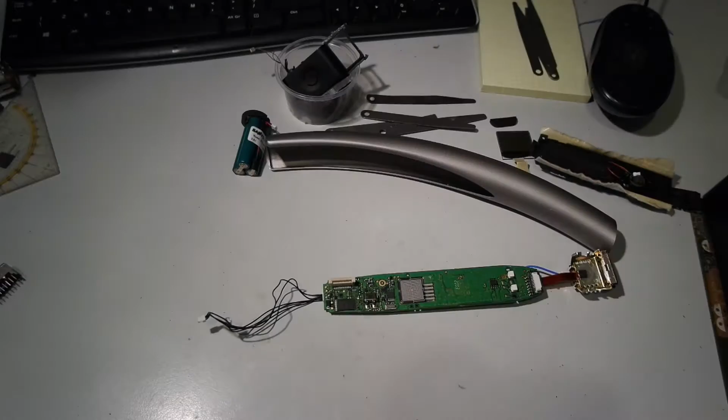The last time I worked on this phone was a while ago, and in the meantime I've been busy with other stuff because I didn't really know what to do with these plastic rivet kind of things. They're not really rivets, I think, but I presume they are attached to the top part of this assembly, and then heat staked or just melted to form a sort of rivet bond.

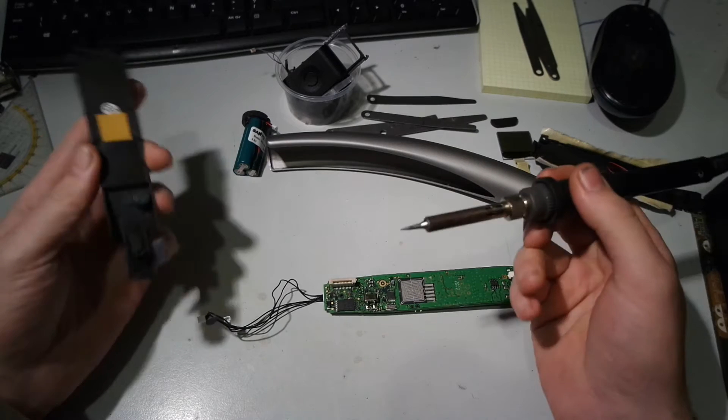This part is made out of two smaller parts, and I'm gonna try melting those rivets again and see if I can pry it open carefully.

This is an old soldering iron tip. I've already got some new ones, and I didn't really like this one anyway, so I'll use it on this phone. Put the plastic in a stick vise, and my soldering iron set to go above 200 degrees Celsius.

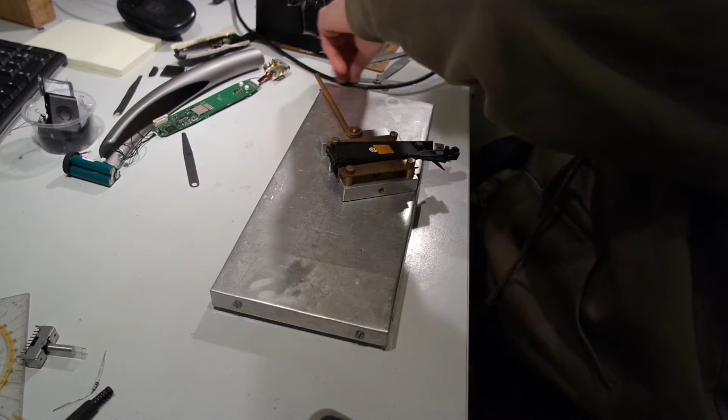Plastic is melting. The feeler gauge is doing the thing. This part isn't square, so it's not easy to hold in a vise.

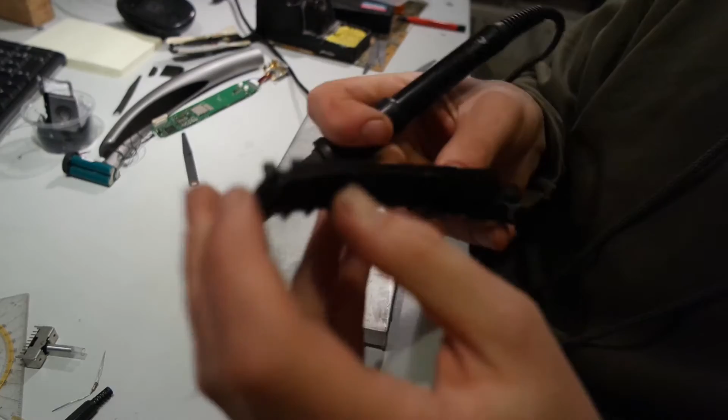This is the first time I'm trying to unsolder plastic. The first one gave way. You can see it's closed, and this one is open. And there's this hook - I don't know if it's grabbing the top part or just for locating it. I'll have to see.

Might even try a bit lower temperature. I don't know if it's accurate anyway, so I only use it as an indication of the temperature I want.

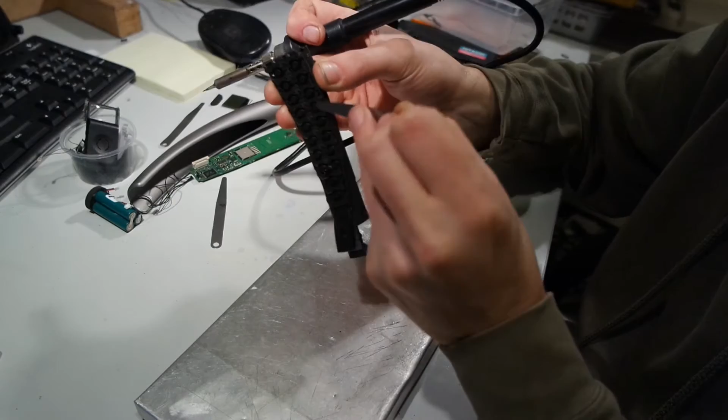I decided to unmelt these, partly because I recently did a project in which I tried some gluing of ABS plastic, and it seemed to make a good joint under certain conditions. So I'm planning to glue this back up using that technique.

Maybe overheating this one, or over-melting even. This is a protective pad for a directional button. I'm gonna remove this one.

This is... I don't know if I can focus. Maybe like this. I think I can remove the bits of molten plastic if I want, or some I can just leave like this. It will probably fit back together.

This is the top of the bottom part, which is just a solid base for the contacts. Now there's something in here - I think it's the microphone.

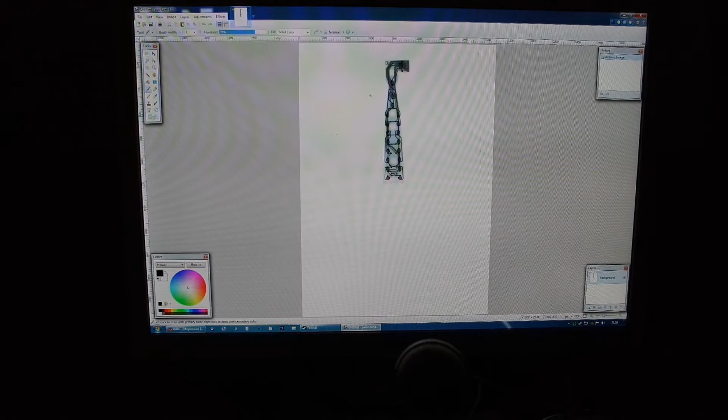In my last project with the keyboard, I thought about scanning one of those flexible circuit boards just with a scanner and loading it up in a computer to see if you can do some line tracing with it. I've scanned it. I will scan the backside in a minute, and then I'll try to do some editing on the scans.

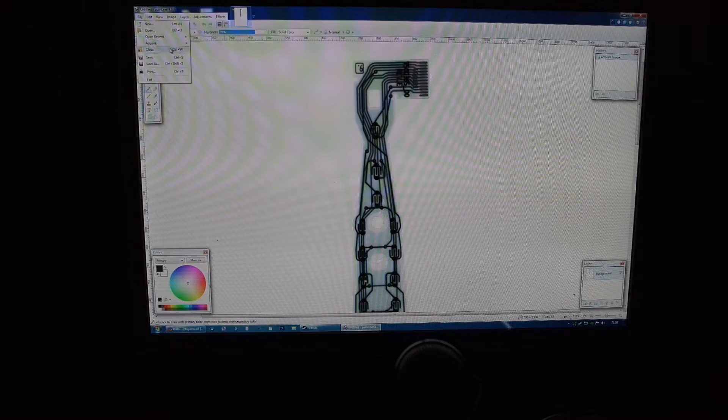So I've put them side by side. Maybe I can do this.

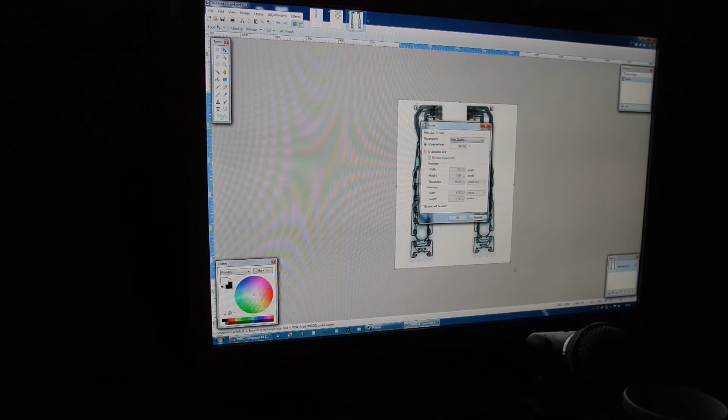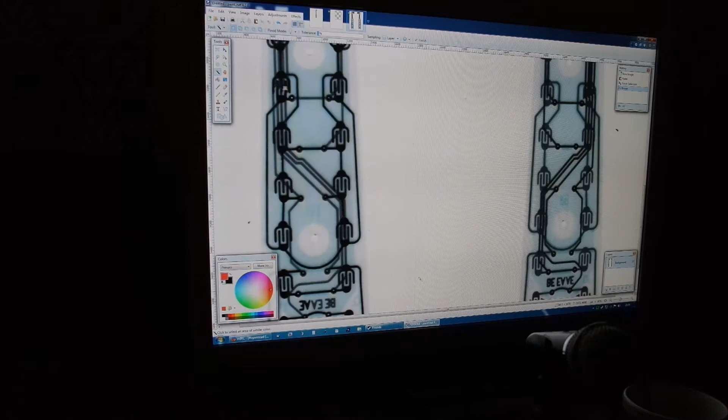It will create quite a hefty file, but now it might be easier to get some pixels from the lines. Let's just pick a color. Let's see - basic one, tolerance.

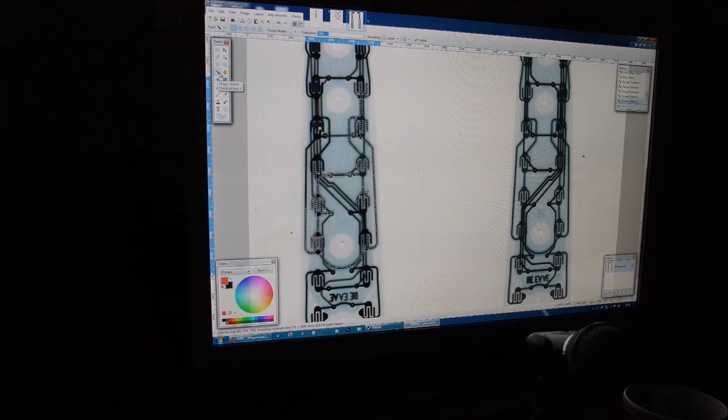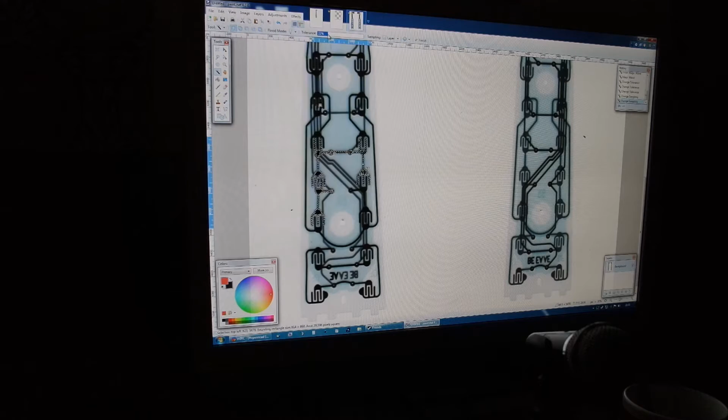It's making a contact here where there isn't, because there's a layer underneath, which is also a dark color, and the tolerance is set too high.

Let's paint this red. Let's put this all the way up.

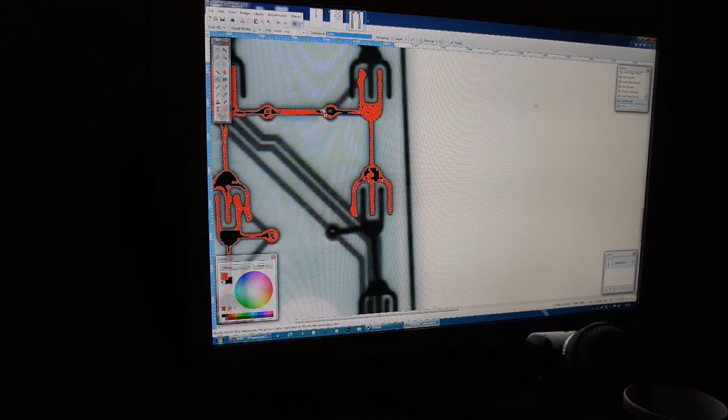Right. It was not supposed to happen.

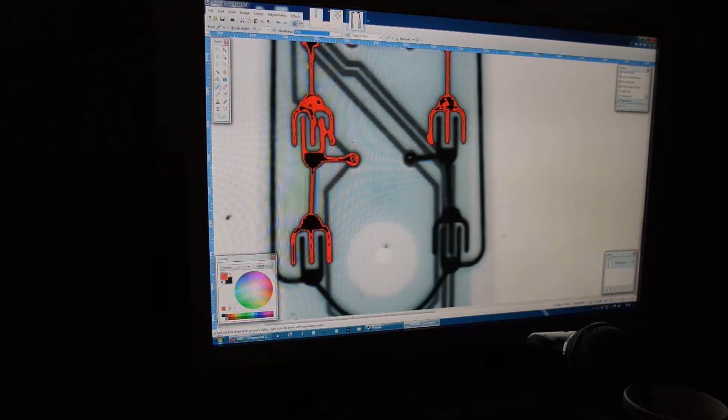So we can follow this wire all the way. There's a via here where it disappears on the bottom layer, which is mirrored, so it's this one.

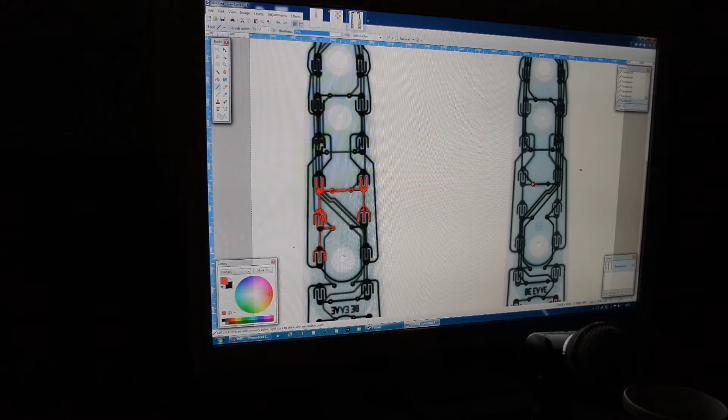Tracks. Here the colors are quite similar, top and bottom layer, so it might be a bit harder to use automated tools.

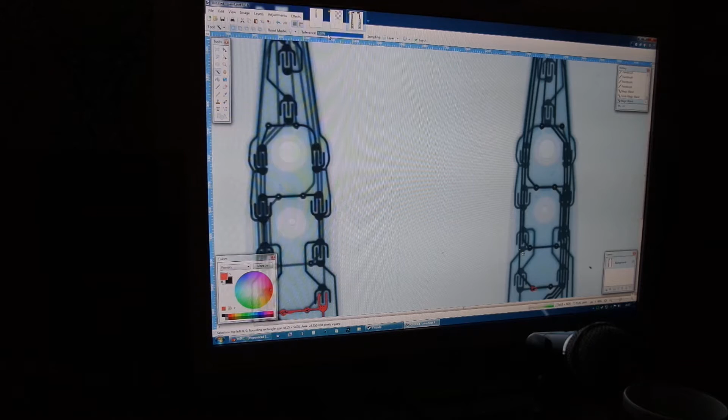Here the selection area is bigger than it should be. Wait, this one has a line tool.

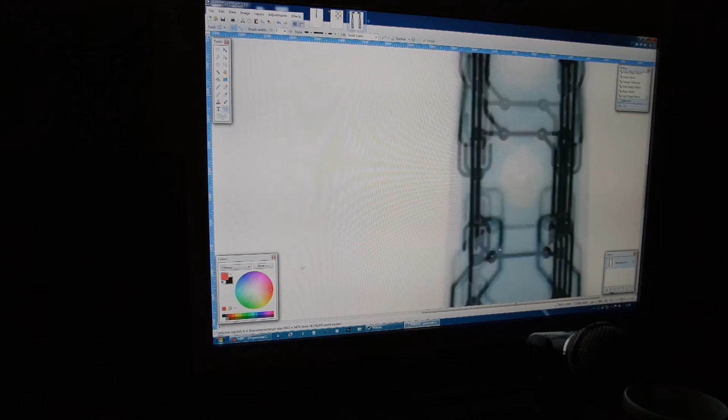This is paint.net 4.06. Oh, making a nice bendy line. Solid line, flat. Okay.

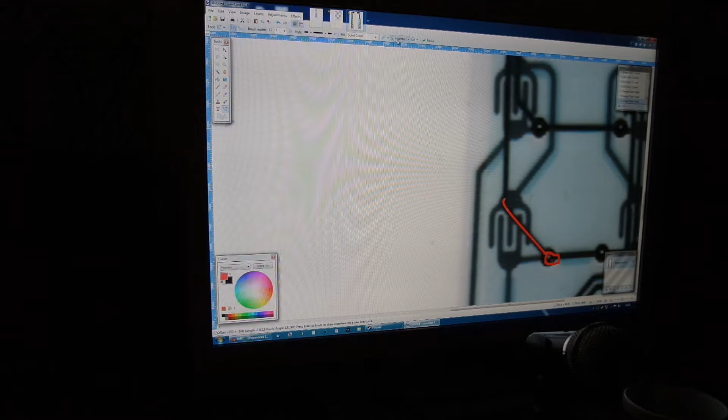I'll just make a new one. Let's see.

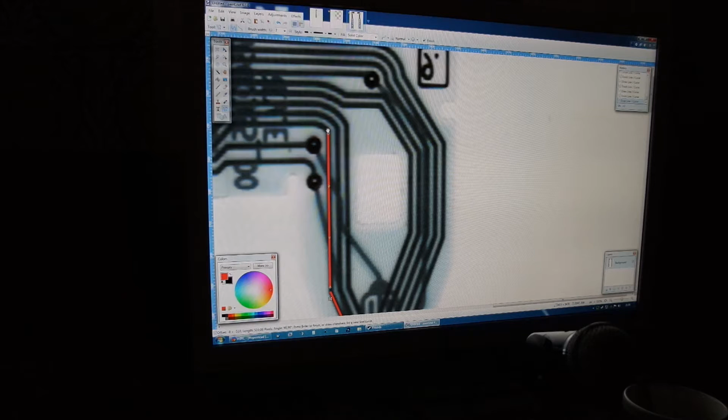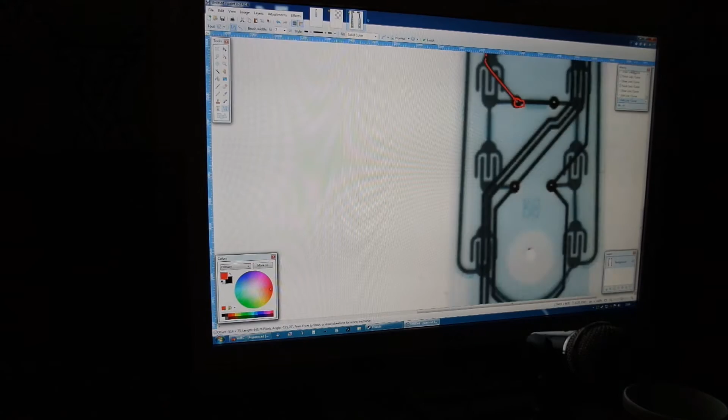I mentioned a project with the keyboard, and the type of conductive layer was a bit different than on this flexible circuit. This one might be a bit more delicate and prone to scratching.

Now I just did this as a test. I will now continue to fill most of the circuits with colors.

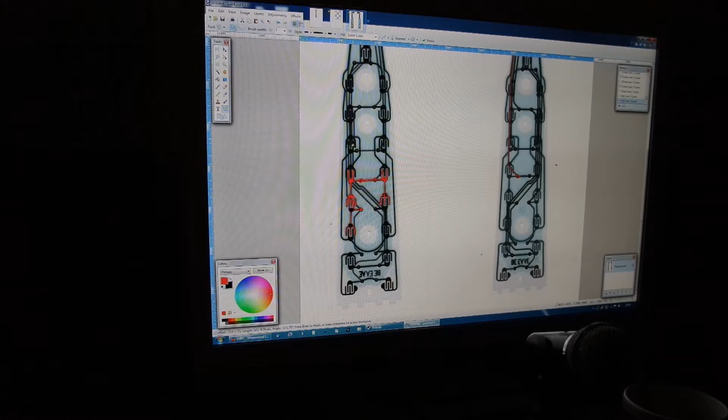So I traced everything. Didn't take too long. I don't know how long exactly, but I can find out if I zoom out a bit, or by the dates from the video files.

These are the traces for the contacts. It's a dual layer board. There's contacts on one side and covered contacts on the other side with vias.

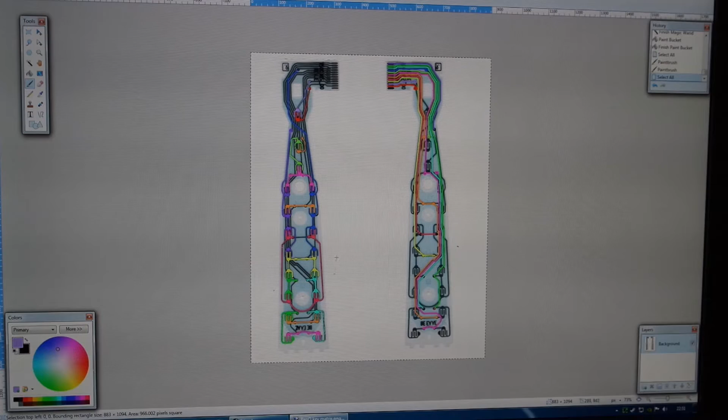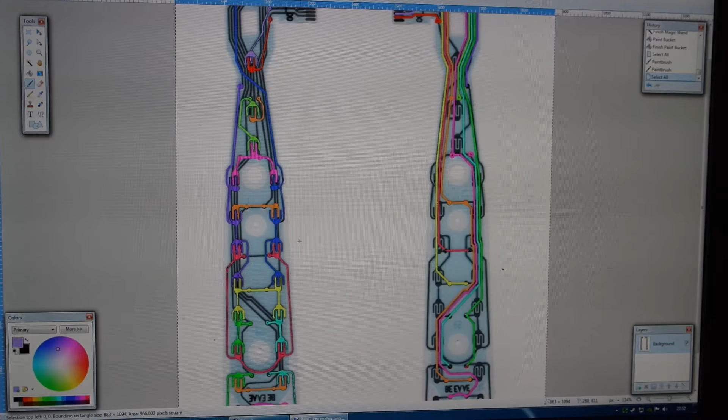And now I know what I need to check if I want to fix the numbers. I've got this number 3 button, which is orange, connects with number 4, and 2 other buttons which I don't remember. And it is the 6th layer from the left hand side, if I look at it this way.

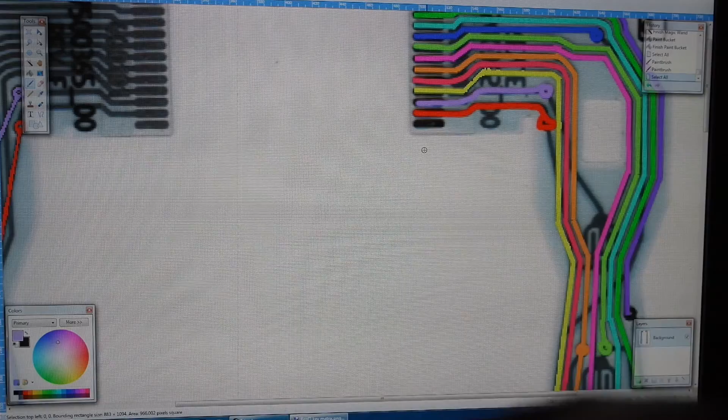Well, this wasn't too hard, and now I can look it up if I have more troubles with buttons. Maybe I won't be able to get the top back on in one go, and maybe not all buttons will be functioning, so I can always use this later. I saved it, and maybe someone else can use it too.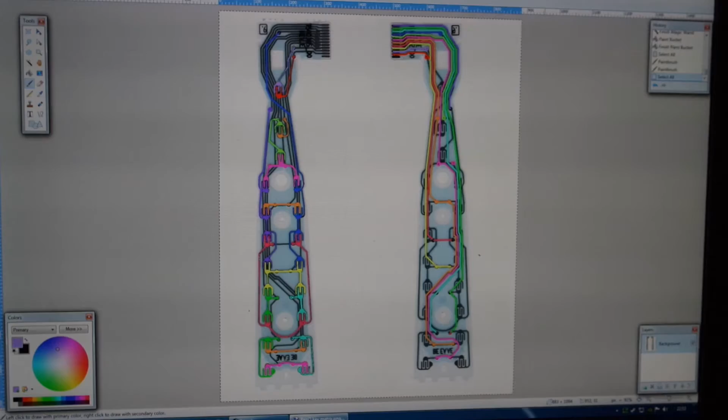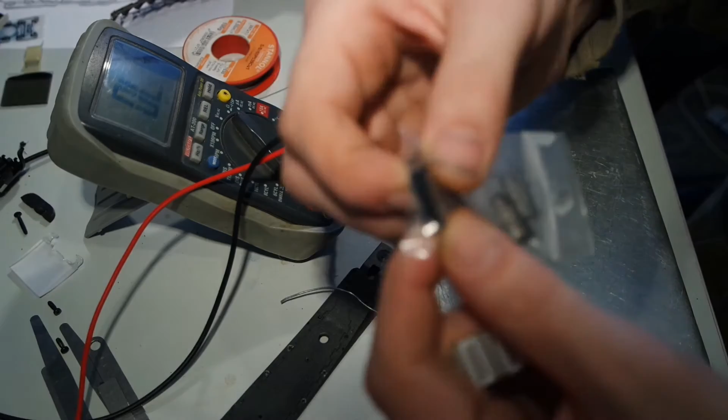I remembered I had a few of these displays. They come with a flexible connector. It's a 14-pin connector. They also came with a set of connectors to solder on the board and adapter boards.

So I put this testing connector together. It fits the flexible circuit from the phone. This one has 12 pins, this one 14, but that's not a problem. You can just fit it in here.

And I also remembered I had to fix the wire for the speaker, and since I'm soldering, I might as well do that now.

These wires are sometimes a bit hard to strip. I'm trying now with a scalpel. I don't want to have to remove any more wire than is really necessary.

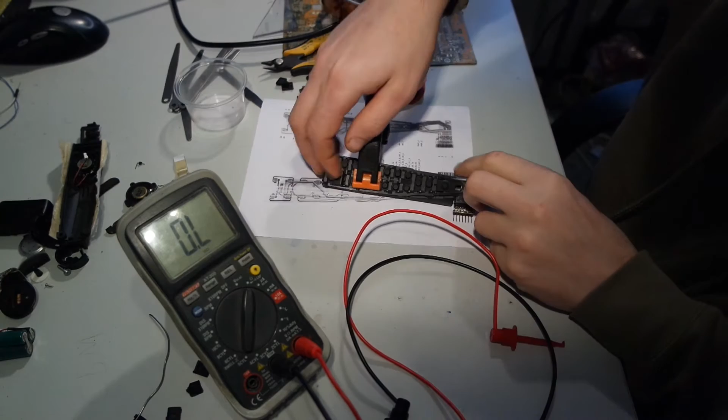Then I'm gonna do some testing. I put all the parts together. It's not fixed or anything like that.

And the problem was the 3 button. If I find the 2 leads it's connected to, let's see, number 6 and number 10. Six. And 10.

Then I'm getting a connection now. There's 2 leads for every button, and every lead has multiple buttons, so there's some kind of matrix. For example, button number 6 also has number 4. And if I check the other lead for number 4, that's pin number 11.

Then I can also measure its connectivity. There is some resistance in the lines. I think it's got something to do with the type of conductive layer they use.

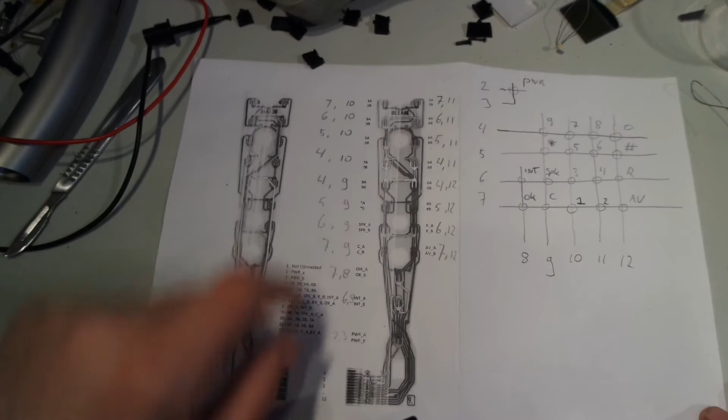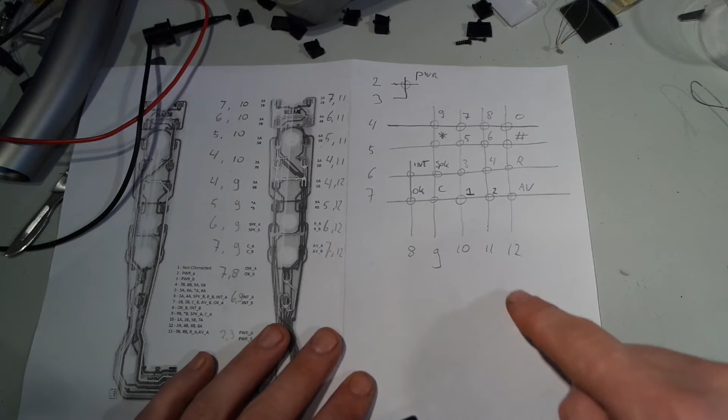I'd listed the buttons for the connections, but not the other way around, so I did that. It makes it easier to check. And you can see that every button has 2 leads, and these leads form a kind of matrix. There are, like here, 4 or 5 data lines, and button 1 is over here, button 2 is over here, and there doesn't have to be any logic in it.

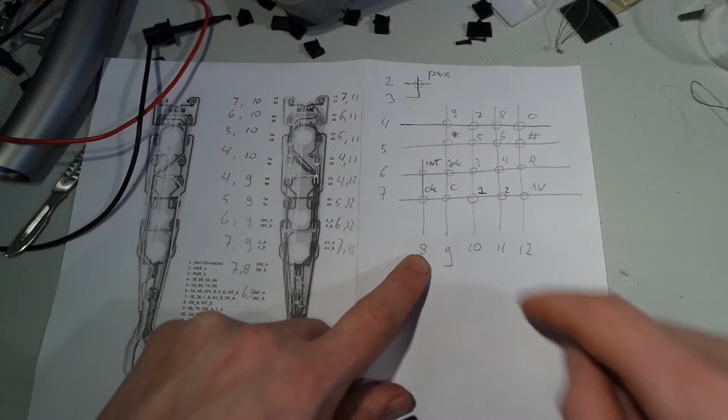But what happens is that the phone's electronics check if there is a connection with line 8. It checks the 6 or the 7. If there is a connection, then it checks the next one, and the next one, and so on and so on. Only the power button is separated.

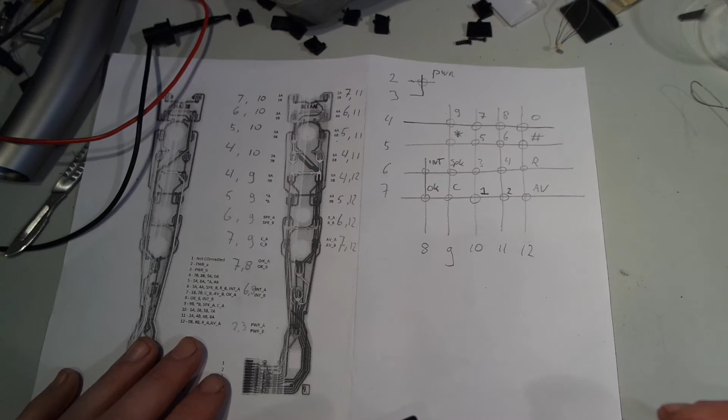It's used to save energy. If the power button isn't pressed, then the checking can be done at a much lower rate, so that saves a lot of energy.

The scanning is constant and very fast usually. It's called multiplexing. That's how most button panels and remote controls and that kind of stuff works. Also keyboards. And usually a lot of stuff with a lot of buttons.

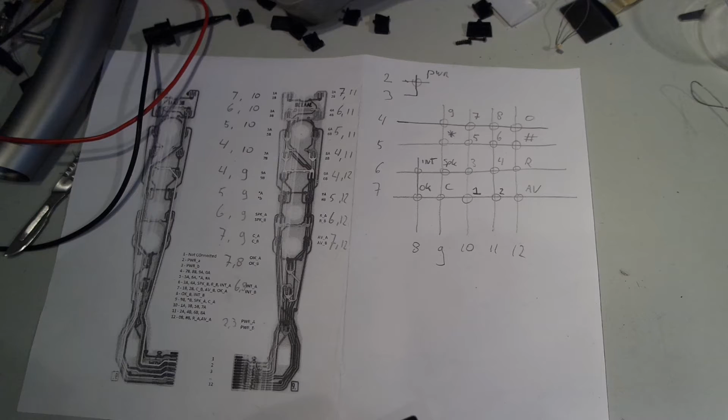Now let's check the buttons. I will start with pin 10. This one. And pin 7. This should be button 1.

If it says OL or something like that, then there's no connection, and now it's measuring resistance. Then there is a connection. That's lead 7. I'll go to 6.

Number 3. Five is number 5. Four is number 7.

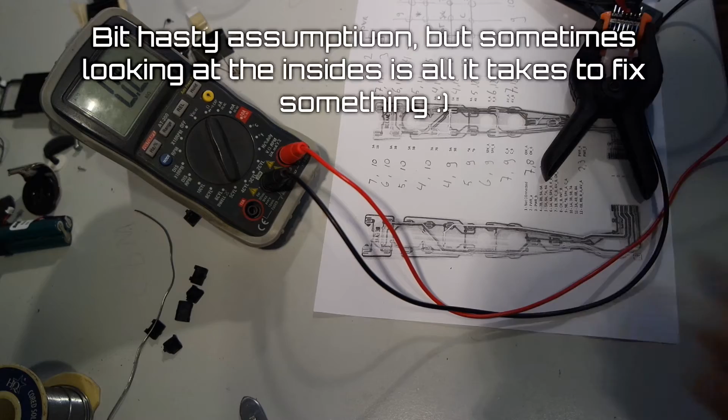So now I think I'll just try to put the parts back together. I brought some tools. I've got some old files, they're not really good anymore, but I've got one which was quite dull.

The tip was also damaged. Let's see if it can focus. I've ground a lathe-type cutting edge on it—the steel they make files out of is quite hard, so you can use this stuff for other things, like making chisels for wood carving. But I've made this knife out of it. I don't know if it's gonna work, but maybe I think it has a chance, so I'm gonna try it now.

If you want to try if one of these edges is sharp, you can try it on a nail, and you should be able to make a curl.

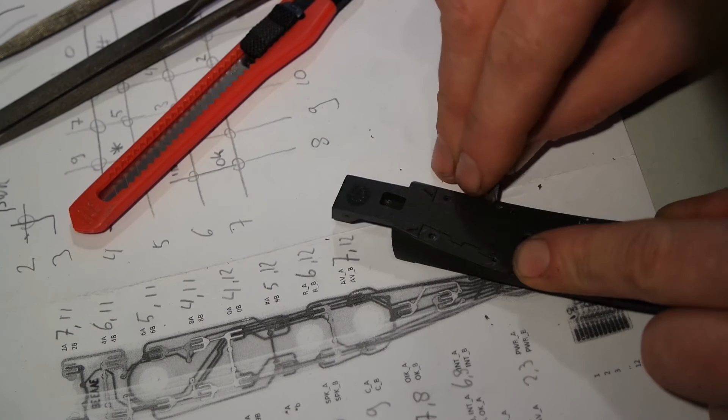Can't reach in here with a file anyway, so this tool might be quite handy for this. Don't really know what the best cutting edges are for the different materials, but I know how to grind lathe tools' edges, so I just use that.

Since I think a normal chisel would carve in too much, I use this one instead—a very sharp flat point, with this kind of angle.

I think this works quite well.

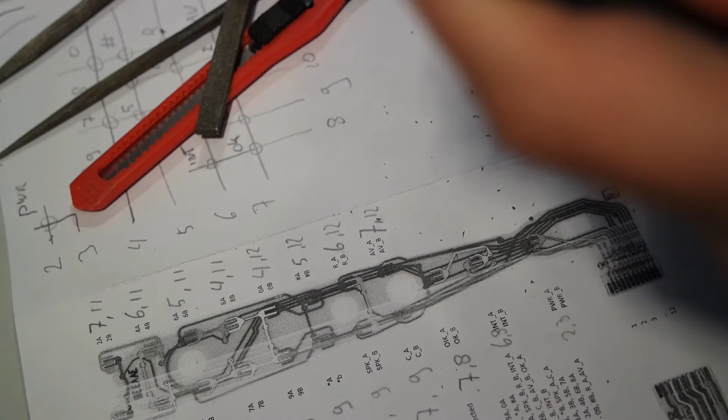My camera display is mirrored, so that's sometimes a bit weird.

I can just move the... where is it? Here. I can just move the scraper along the edge.

So this works quite nice. Yeah, I think I like this tool. I'll definitely be using it more often for this kind of stuff.

Next thing I'll do is scrape off a bit of this edge, just to rough up the surface. Not trying to remove a lot of material, but the current surface is nice and shiny, and I want a bit of a rough surface for gluing. I decided to glue the parts together

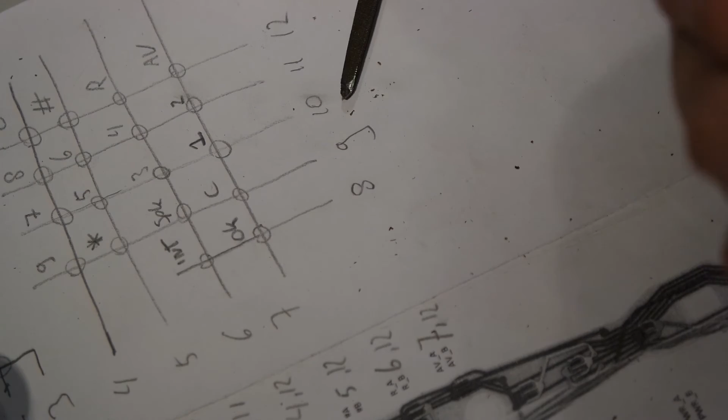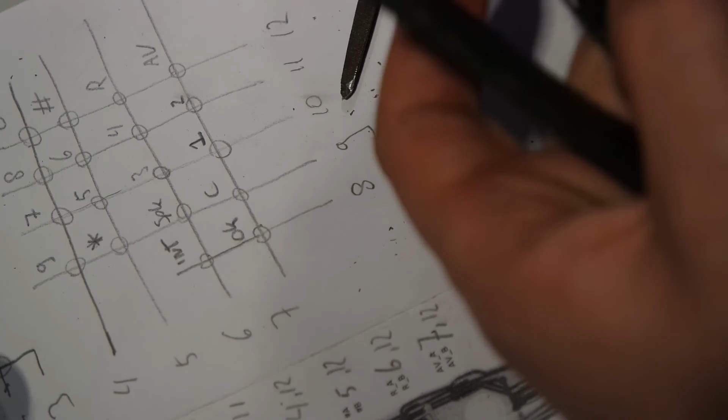I missed this one, I didn't notice it—there's a pin here, which I won't remove because I hope I can glue them where they are right now. That will pull the center of this piece of plastic in, so it won't lift out like this. There was one over here too.

Melt and close this hole a bit. Right, now it's time for gluing these parts together.

Maybe just a tiny bit of scraping on this edge, just to make the surface a bit rougher, to get a bit more contact area for glue.